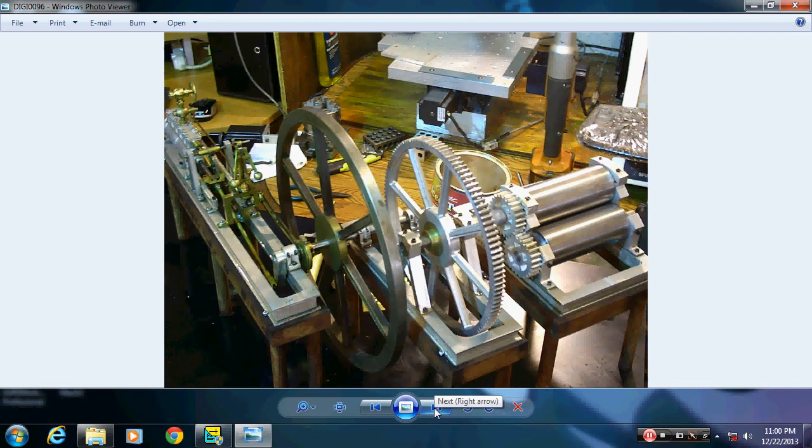So in the next pic, this is the actual gear that I made over here, and it has a gear shape that's very similar to the original gear, and it also has exactly 100 teeth in it that the original gear had. And I'm going to show you how I made the cutters to cut the gear, and then show you in Mach 3 how I set it up to cut 100 teeth in this gear.

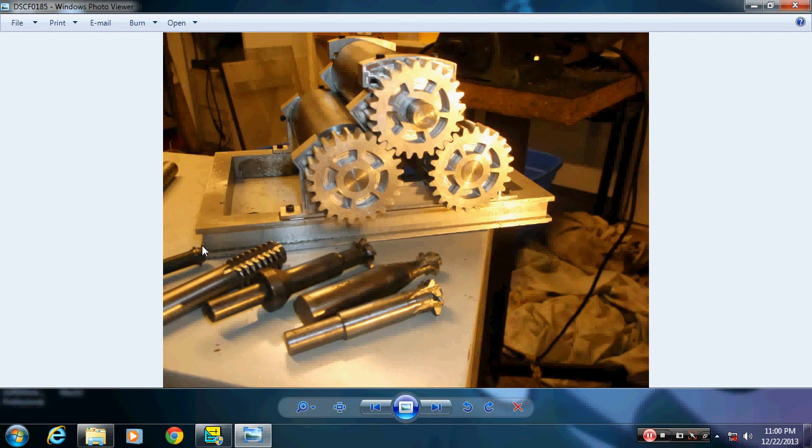So in the next photograph, these are some of the smaller gears I made. This little cutter here cut the bevel gear set that I made for the flyweight governor. This here actually cuts splines on a shaft. It's not part of the model project, but that was just another gear cutter, I mean a spline cutter that I made.

These three here, before I started using the discs, are the involute gear cutters. I don't know which is which. I believe these two laying here cut the ring gear and the small gear that drives it, the big ring gear. And I believe this one here is actually the one that cut these 3 gears.

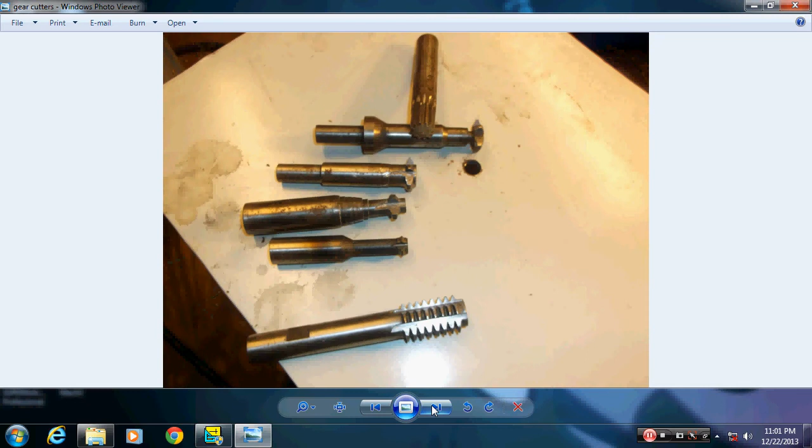Now I'm going to show you how to come up with a gear set to the scale that you need, because I needed to match exactly how many teeth were on each one of these gears to what the original steam engine had. So bear with me here a little bit. I'm a stutterer. Okay, here's another view of these, and there's the spline that the spline cutter cut. So we'll go from here now, and I'll show you.

Excuse me. This is the design of the gear with 100 teeth that I made in eMachineShop. Now, I don't flat cut these gears on the mill. I actually produced, like I showed you, the gear cutter and cut one tooth at a time, and then Mach 3 has the software to turn the 4th axis to produce this gear. This drawing is more for the spoke layout on the actual gear itself and centering the hole up. So I'm going to show you how I go about doing this.

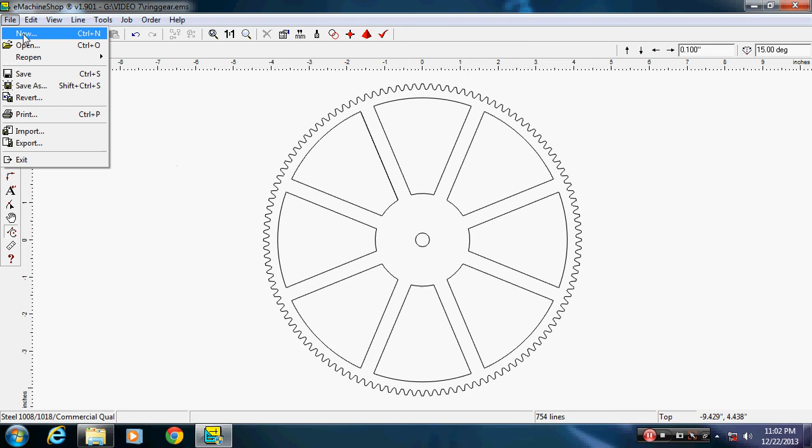In eMachineShop, when you click on New, you can pick spur gear, and then you can actually design any gear you want in here. You can change the settings to produce a gear that maybe you have to match, or you're trying to figure out what pressure angle and diametral pitch you have on a gear that's broken, that you want to reproduce without having to go through all the mathematical equations and everything to do it. So I'm just going to quickly go into how I did this one.

The original gear on the steam engine was 12 feet, and my scale model is 1 inch to a foot. So I needed to make a gear with a 12-inch outside diameter. In the U.S., there's 3 basic pressure angles. 14.5 and 20 are the common. 25 is there, but I don't believe it's very common. In my particular situation, to come up with the correct style of tooth, 14.5 looked more like the original tooth. Bore diameter I'm not going to worry about, and I'll explain to you why later.

I need 100 teeth, so I can go ahead and type that in. Let me go ahead and hit enter before I get ahead of myself. Now, if you look here, with 100 teeth, a 14.5 pressure angle and a diametral pitch of 20, I have an outside diameter of 5.1. Well, I want a 12-inch gear. So to change this to a 12-inch gear, I need to change the diametral pitch. If you go up with this number, the gear will actually get smaller. The smaller the diametral pitch, the larger the gear.

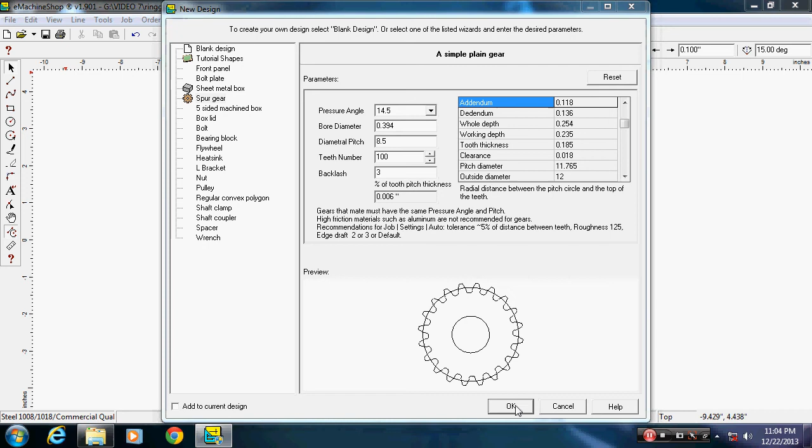I already played with this. I know what it takes to get the gear I need, and that's 8.5. So I'll type in 8.5. And then backlash is how much play is going to be between the two gears when they're meshed against each other between the teeth. 3 percent is fine for what I'm doing. I don't know what it's actually supposed to be. Like I said, I'm making these for hobby purposes, but it makes an excellent gear. So I'll go ahead and click OK, and it'll produce my 12-inch gear.

It's going to pop up trying to go ahead and make it in 3 dimensions. I don't want to see it in 3 dimensions right now. We're not going to make the gear from what this is producing. We're going to make the involute gear cutter.

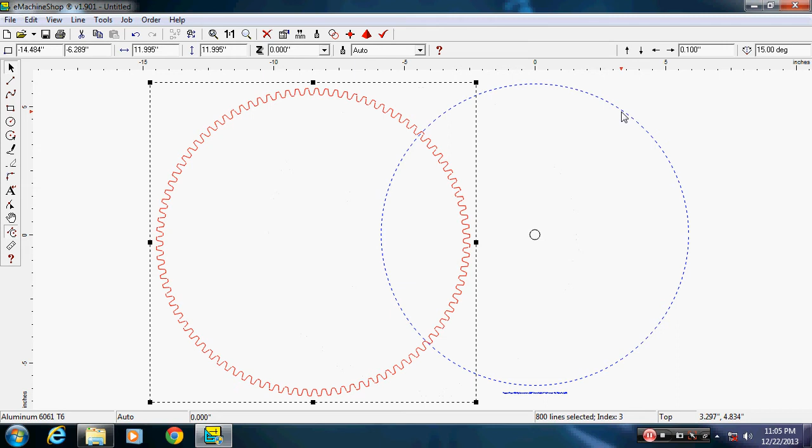So the first thing I want to do is actually select the gear itself and just move it out of the way. It takes quite a while because there's a lot of line segments in here. So the more lines that are in the program, the longer it takes for it to actually work from step to step as you're going along. So I'm selecting this blue line here, and I'm just going to delete it out. Then now I'm going to select these blue sections down here, delete them out.

I'm going to go ahead and select the gear. Now, all I want out of this gear is one valley in between 2 teeth. That is the shape that your involute gear cutter needs to be profiled at. And so in order to get that, first thing I have to do is ungroup this gear, or it won't let me select just one part of it.

Then I'm going to select the bottommost valley, and it's alright to go ahead and take extra. I'll select the bottommost valley. I want to right click on that. See if it'll let me do it. It's moving kind of slow because there's so many lines. Alright, we're just going to go up to Edit and click Copy. And it copied just what I have highlighted down here at the bottom.

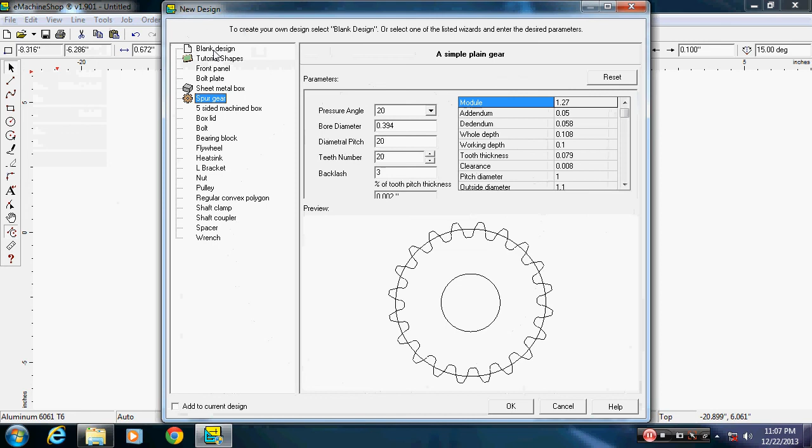Then I'm going to go File, New, move back up to Blank Design, get me a new blank screen. Click OK. Says I don't want to save that gear that I just produced. Like I said, I'm not using that for this purpose. And I'm going to paste this profile in here. Now, the only thing I want actually is this profile right here.

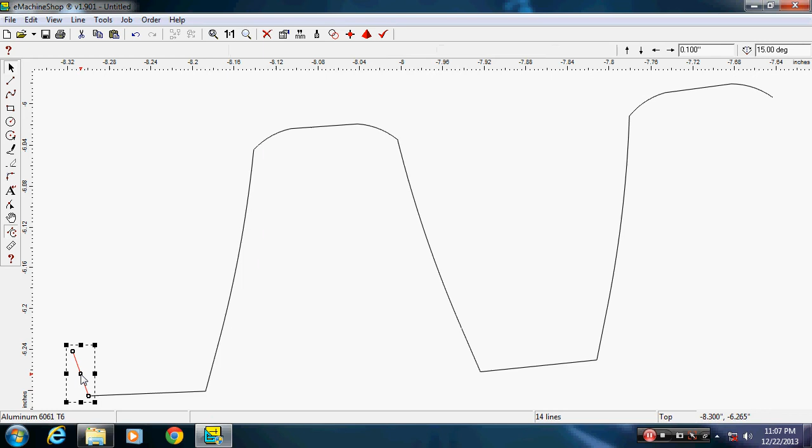And if you were going to grind a single tooth cutter, or in my case, I use that profile to write G-code for a CNC lathe, and I actually make an actual involute gear cutter. So I'm going to go ahead and delete the sections I do not want off of here. Now, this is only the involute gear cutter to fit the 100 tooth gear. The mating gear for this is, I believe, 12 teeth, and in order to make its cutter, I have to draw the 12 tooth gear the exact same way and pull its file out the same as what I'm doing here now.

Once I have this profile, you could write the G-code and go ahead and have the mill put an end mill in the mill into some stock and have the mill cut this profile on a blank for a fly cutter.

I'm sorry, I am tired and stuttering a lot.

What I want to show you next is, obviously, this profile is cockeyed, and normally this is the case with the eMachineShop. So I'm going to back off here just a little. I don't have to so much. Let's move it back into view. I just want to make it large enough you can see what I'm doing. Make sure that over here your snap to lines is on.

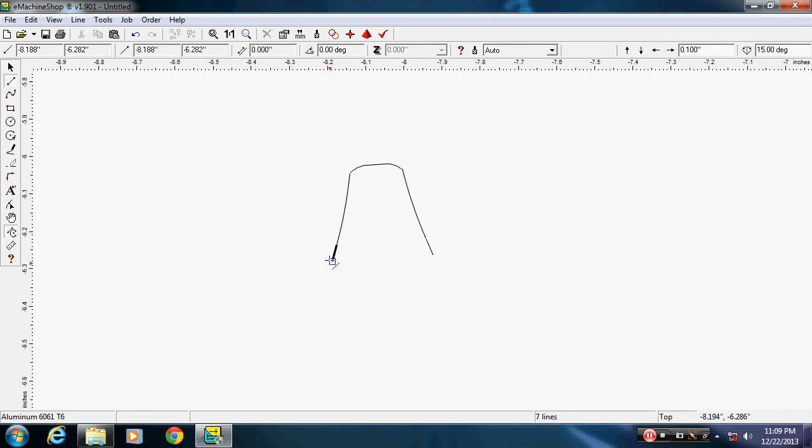Pick up your line tool, go to the very bottom most left section and click the start of your line and come up, and the farthest left top section will go ahead and automatically light. Put a line there. Repeat that and do the exact same thing on the other side. And I'm going to show you how to straighten out this profile so it's correct for what we need.

Put a line there. Now that we have the lines on both sides of this, I want to take these lines and make them 1 inch long so they extend above this profile and actually cross over each other, and I'll show you why in a second. So I'm going to make this line 1 inch long, and I want to make this line 1 inch long now.

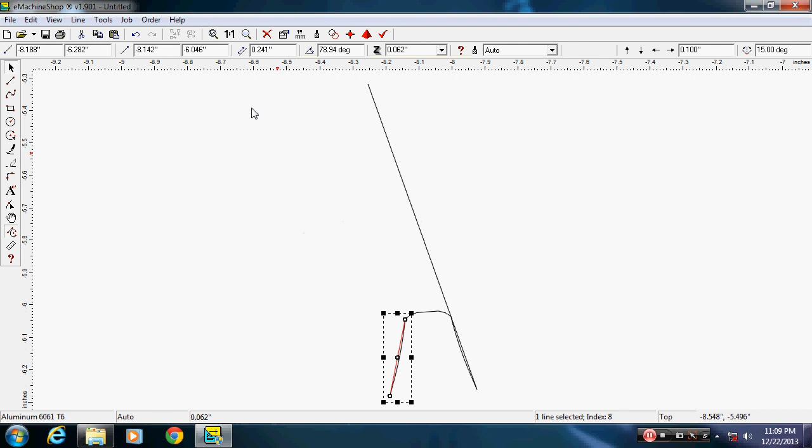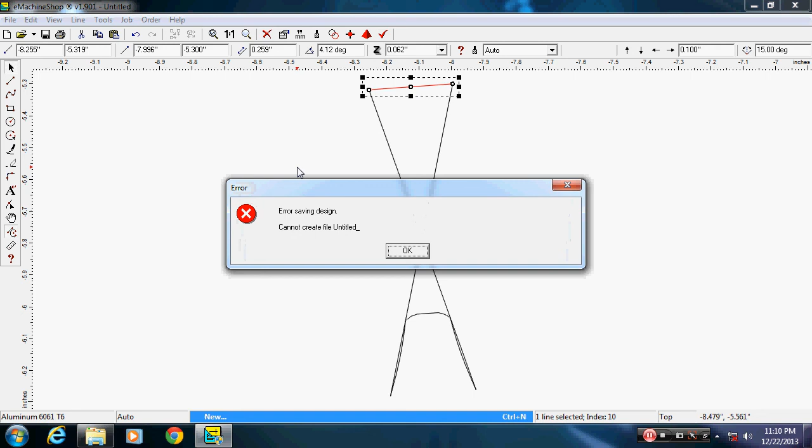Now from here I want to draw a line across the top of these two lines and read the angle this is at. This is at 4.12 degrees. So this profile is sitting 4.12 degrees past 0, and I want the profile sitting at 0 for my uses.

So the way to correct that problem is go to Edit, Select All. Now if you look on the side here, there is Control A, Control F, Control V, F2. There are key functions that you can do on the keyboard to do these things faster. I don't do that when I'm demoing it because I think it's a little more confusing. It's better to just go to that actual selection and select it. So I'm going to select all.

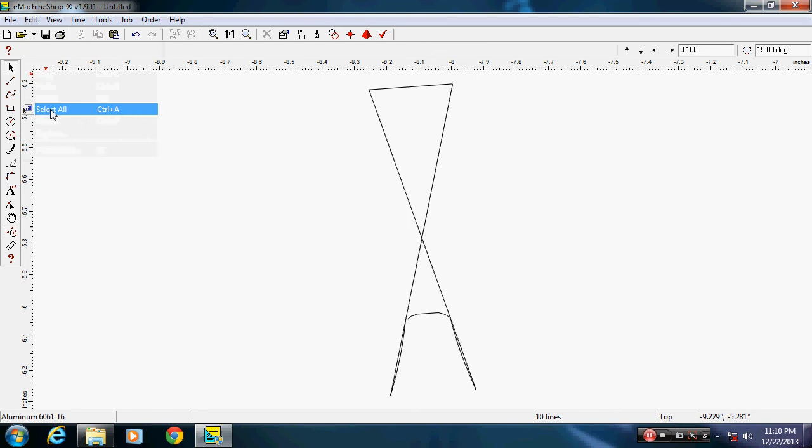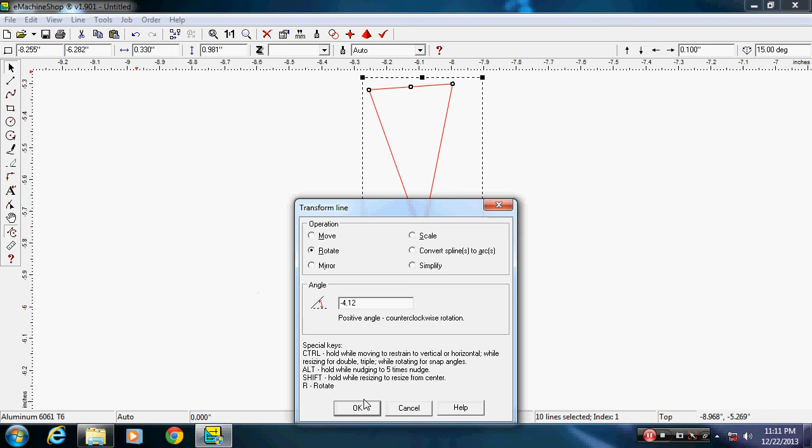Then I want to go into Line, and I'm going to transform this line by rotating it. Now since it's beyond 0 by 4.12 degrees, I want to subtract minus 4.12, and click OK, and you'll see that now it's rotated everything in the picture and in the drawing, and it has straightened it out. If you click on the top line now, it's sitting at 360, so that means this profile now is usable and it is straight up and down.

These lines that we added to do this, we're going to take out, and then from this profile I can produce the G code. I have to do it in other software besides D2NC for the CNC lathe, and I'm not going to go into that at this point in time. You could, like I said, use this profile with D2NC and cut it in for a single point cutter for a fly cutter.

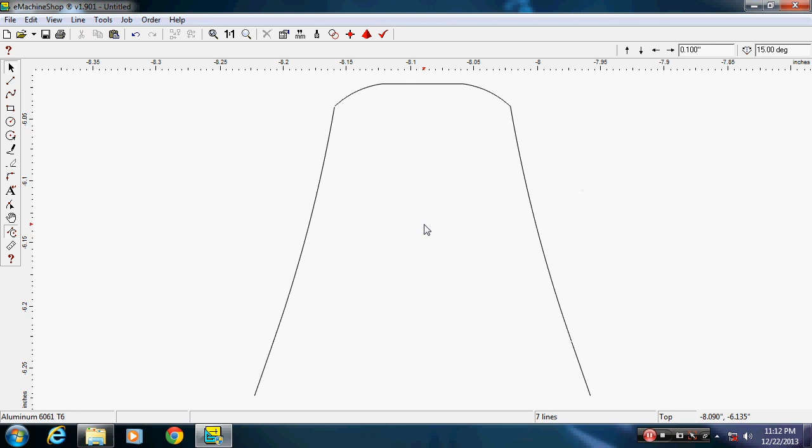Now what I'd like to do is, once you understand this profile and we've made our tool, let's say we've gone that far, I'm going to go to Mach 3. I'll go ahead and shut this down. I don't need to save it. And I'm going to go into Mach 3 and show you how we set up Mach 3 to cut this gear on a 4th axis.

If you don't have a 4th axis, you can do it manually. Make your tool, divide it up. I don't know how to use an actual rotary table in that sense. I didn't buy all those tools. I went CNC. So going to Mach 3, I'm going to select mill.

There was one thing that I forgot to do when we were back there on the drawing, and I'm not going to do it right now. If I would have drawn a line across the opening at the bottom of that profile, and then a line straight up and down through the center of it, that would have measured the total depth of cut that the tool we made is going to cut into this gear. You'll need that. I should have done it.

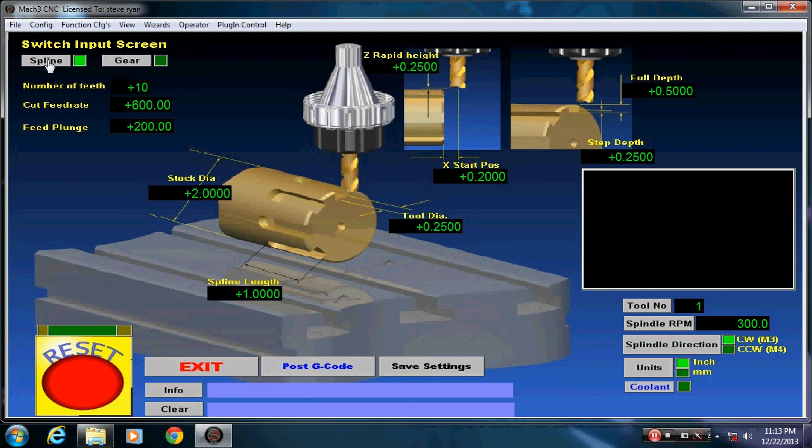To get Mach 3 to run, since this is not hooked to a machine, I have to hit offline and reset. And if you go up into the wizards, these are actually some of the free wizards. Newfangled and some of the other ones cost money, but gears and splines, you can search for these. I'm going to run this. It's asking me first off if I'm going to cut a spline or a gear. I'm going to cut a gear.

At this point, you want to restrict the Z movement. So once you've actually set Z and you have it zeroed with the center of your blank, then you can use this so nothing mistakenly moves Z. It's a good idea to do it. Next, it wants to know how many teeth. We have a 100-tooth gear.

It wants to know the cut feed rate. I'm sorry, you have to hit enter. You're learning by my mistakes. I'm going to put a feed rate in at 10. We have a plunge feed rate here. I don't plunge in on the material; it's actually going to be completely out of the material on each pass. So I'm just going to set it the same, 10. I don't need a reduced plunge rate for that, and hit enter.

Y is going to retract a quarter of an inch. That's fine because that's a quarter of an inch from the face. Full depth of the cut, that's just luck, is going to end up a quarter. My tool diameter is, in this case, 2.0. I have to hit enter. X start position is 0 positive.

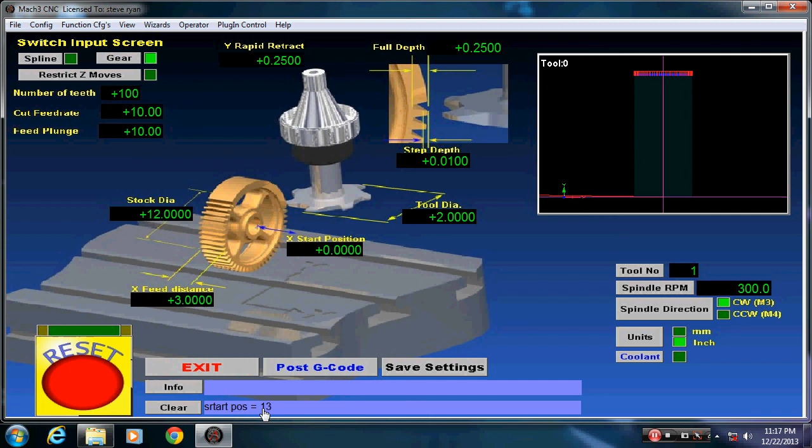Okay, so we got a full depth of that quarter inch I said we got by measuring. We're going to take 10 thousandths per pass. Our tool diameter is 2 inches round involute gear cutter. We're going to move 3 inches of total travel on a 12-inch gear. We're going to cut 100 teeth into it. So we're going to save our settings, post the G code. Start position equals 13. I'm missing something. Maybe not. Let's exit.

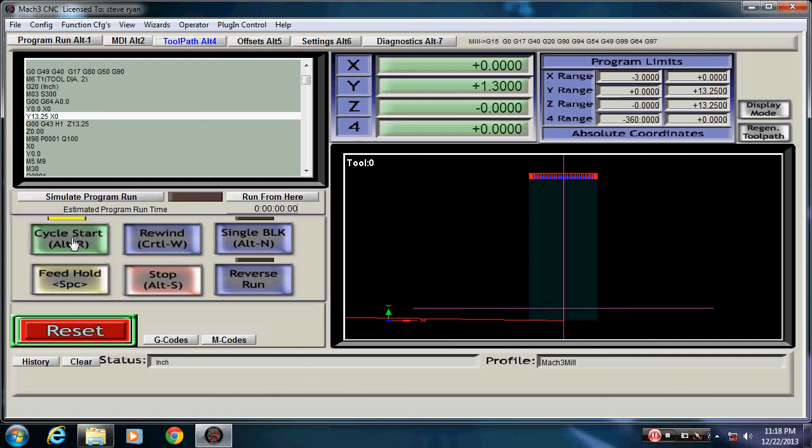The last couple of times I did this, I used newfangled solutions, but it's a little more drawn out. Let's see if I can really get an idea of what we're doing here. On the gear cutting tool pass, it's hard to see what they're doing. Okay, we are looking face down on this gear. So it's kind of confusing, but I'm going to hit cycle start. You can see it go through. Go back to program run, and I'm going to speed this up.

Till it regens. It's just the display is funny. It will make each pass until it has each tooth cut to its full quarter-inch depth. Then it will turn the fourth axis, and that's basically what I'm waiting for you to see. I could have put the depth a little higher and actually had it cut each tooth in 2 passes so you can see it rotate the fourth axis.

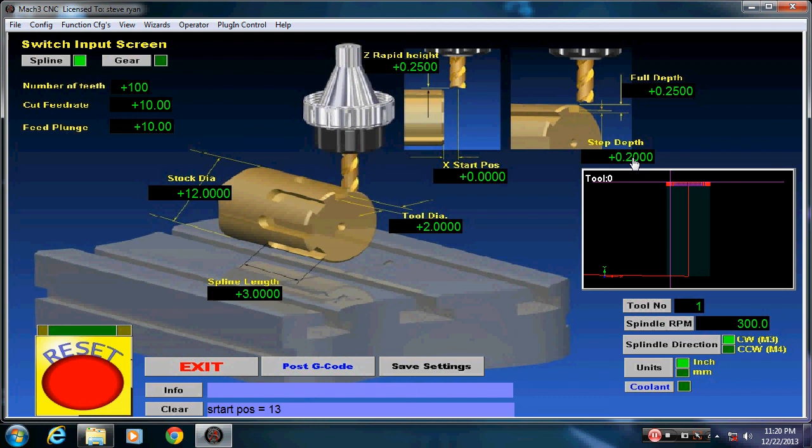But let me do that real quick. I'm just going to go back to the wizard. Pick the last wizard. Okay, where were we? The full depth's 0.25, and let's just make it 0.2. It'll cut each one in 2 passes. Okay, save settings. Post G code. This is just for demonstration purposes. So now it's going to cut the teeth 2 passes, turn the fourth axis, 2 passes.

Okay, this is another thing that Mach does. I need to unload the code that's in there. Okay. Mach 3 does not like Windows 7 at all. I have more gears and splines. Run. Let me come back in and regen this. I'm in my house and okay. That should be what we need. Mach 3 runs its best in XP, but I'm just doing this in the house for demo. Alright, now let's see if I can zoom in on this a little better. We'll zero this, regen it.